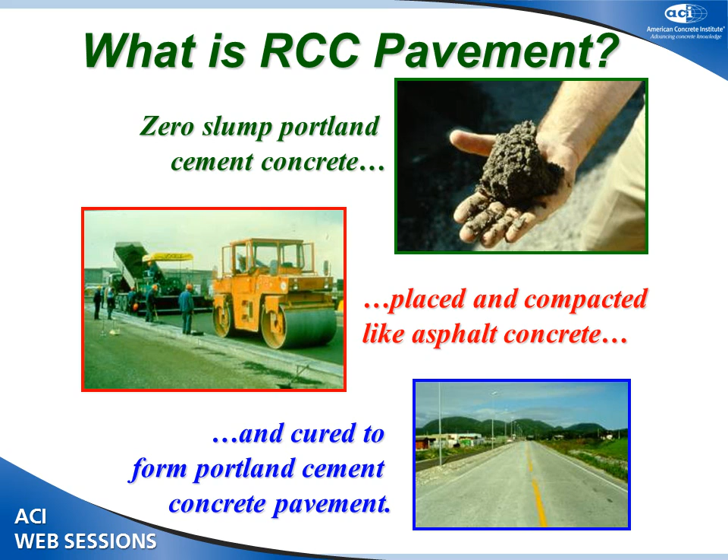Materials and construction - we've already talked about that a lot. The aggregate, can't overemphasize the need for quality aggregate. From the very beginning, on the material side, particularly the aggregate, from an asphalt concrete perspective, you need something fairly well graded. Crushed, in my opinion, is better. Generally what you're looking for is something that will hold up under a roller when you're compacting it. That's what's going to govern a lot of your aggregate properties - how it handles in the fresh state.

Typically a 3/4 inch top size, maybe a 1/2 inch maximum size. You can allow up to 8% fines in it, just to give you a good consistency during construction and help the surface close up. Sometimes you even add fly ash to actually get a little bit more fines in the mix.

Talking about the constituents, you might have a little bit less cement and fly ash, a little bit less coarse aggregate, more fine aggregate - again it takes that to give that fairly well-graded aggregate mixture in the RCC. Definitely less water, and your water-cement ratio, by definition almost, is going to be pretty low, between say 0.25 and 0.35 generally. That leads to very high strengths, by the way.

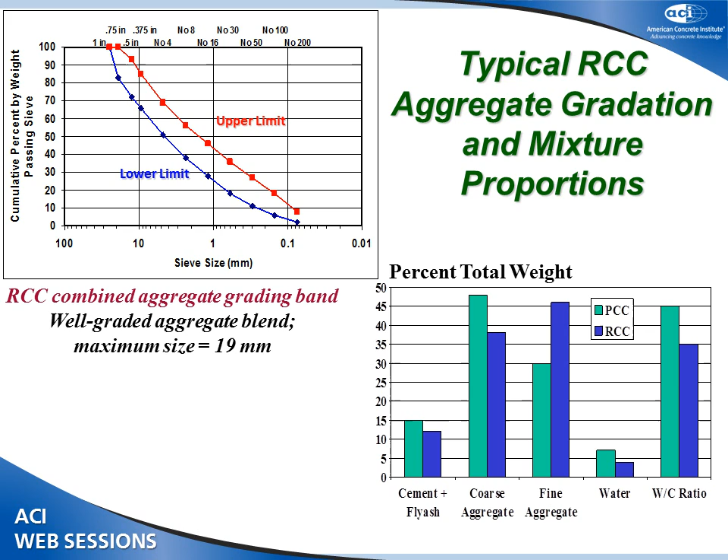We've already talked about continuous mix and Pugmill plants, and Frank talked about ready-mix trucks, but typically in the Corps, at least, we use Pugmill plants.

You see some of the plants we used back in the 1980s. This kind of machine took a couple of days to get set up and running, producing a few hundred tons an hour. But now you can get a machine that can have you set up and running in a couple of hours and produce several hundred tons an hour.

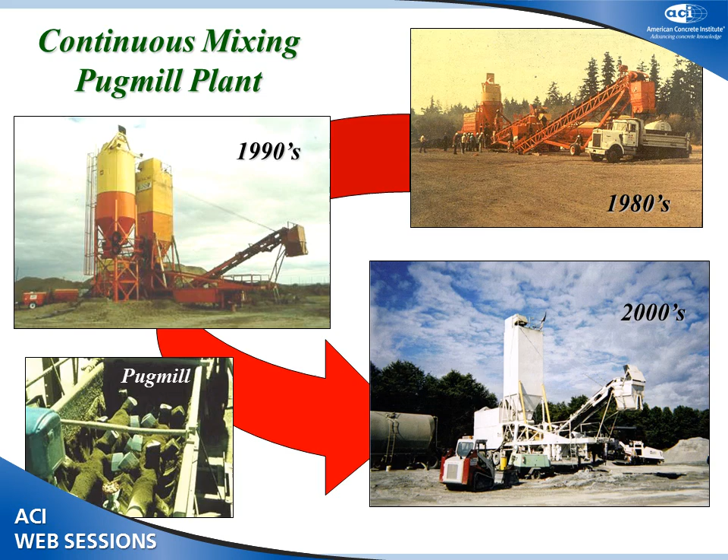Placing, we've already talked a lot about placing. In the early days, we just modified an asphalt paver, opening up the throat between the hopper and the screed. But these days, with these high-density screeds, originally built in Germany and now built elsewhere, that really revolutionized, in my mind, the way you put down RCC pavements. You get a fairly high-density, fairly uniform material coming out of the screed, and that's going to dictate everything about the quality of the final pavement.

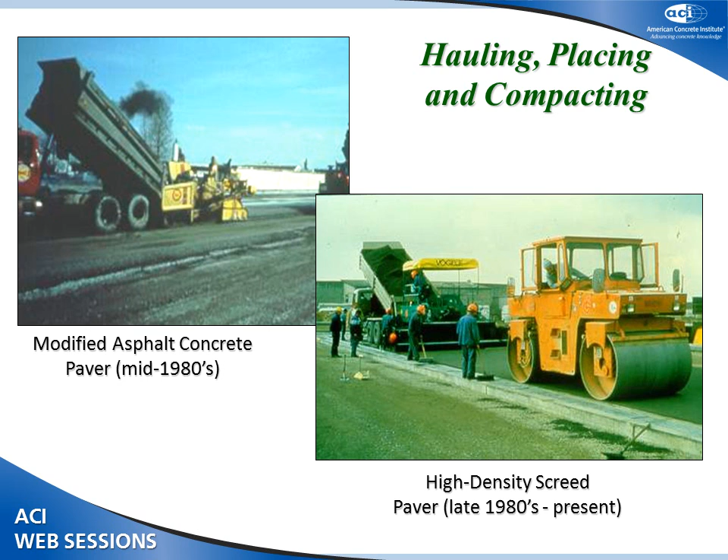And then, of course, we talked about compaction. As Wayne said, that's a very critical point. If you don't get your compaction, you're not going to get your density and strength. Pay that guy right there pretty well, by the way, because he can dictate a lot of the quality of your pavement. If he knows how to operate that roller and get you a smooth, dense surface, then he's well worth his money.

We already talked a lot about curing. In the early days, what we did mostly was water moist curing, and here we are in Germany on some projects where we actually use irrigation sprinkler systems to keep it moist all the time. That's one of the first major lessons we learned at Fort Hood, Texas in July of 1984, on our first major project with the Corps.

We talked about hot, dry, windy weather here in Texas all the time. Well, we found out what impact it has on RCC at that Fort Hood project, and it kind of made a mess of that original project. The surface dried out too quickly, and when the surface dries out too quickly, it crumbles after a few weeks. So we totally understand that now.

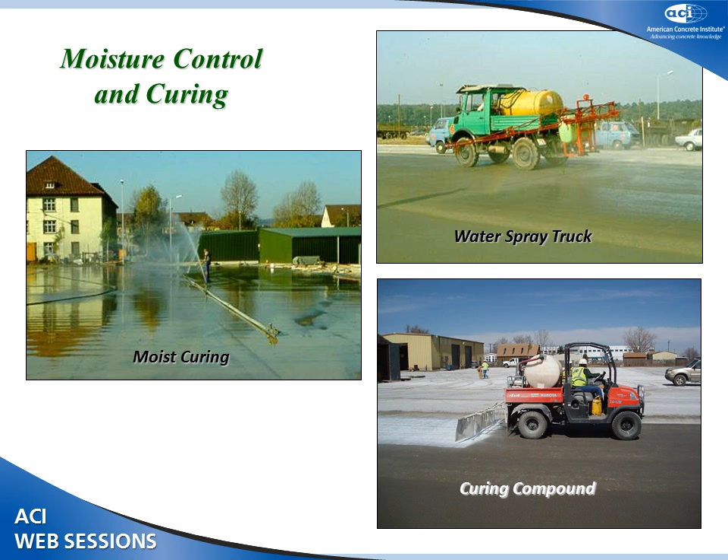One of the most important messages here is you've got to keep it moist at all times until it gains its strength. Use whatever method you can, like a water spray truck, to keep it moist until you can get your more permanent curing compound down. But never let that surface dry out until you develop your strength.

We already talked about quality control and assurance. Again, very, very important. Probably the most important test is checking your density, typically with a nuclear density gauge in full transmission mode. You need to drive a hole into the RCC and try to do it through the full depth, and generally we shoot for 98% density, or 96% closer to a joint, similar to asphalt concrete pavement.

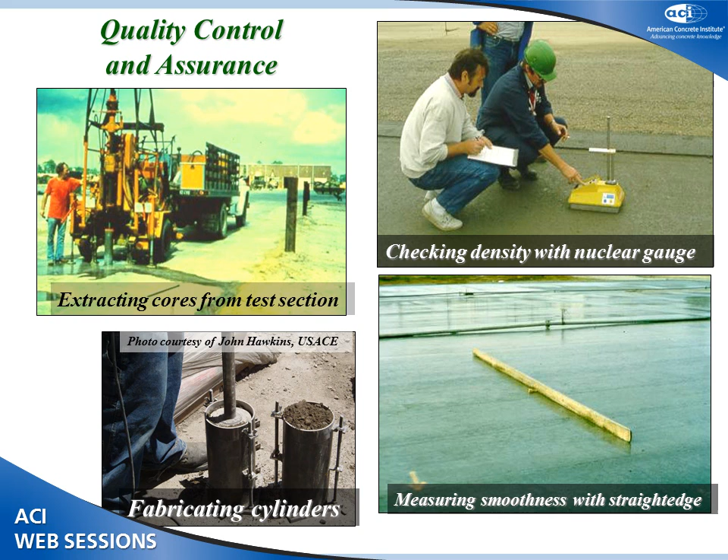We already talked about fabricating cylinders. We have smoothness tests too; we still use a straight edge in the Corps of Engineers. And we have a little bit looser spec on smoothness with RCC compared to concrete. You can go up to a quarter inch off the measuring edge of the straight edge.

We talked a little bit about joints and cracks this morning. In the early days, we allowed RCC to just crack naturally, because that's what the Canadians were doing. We sort of stole this idea from the Canadians for log sorting yards and that sort of thing in the 1970s, and brought it to the U.S. They weren't sawing joints, so we said, why do we need to saw joints? But later on, as we saw the potential of this material, we said we need to saw joints in this.

So what we do is try to follow the natural tendency of the material to crack at 10 to 30 plus meters. The thicker it gets, the further apart the natural cracks will be. I've seen natural cracks occur over 100 feet apart, sometimes 200 feet apart, on very thick pavements. So you want to control that, and you probably want to saw your joints at 10 to 15 meter intervals.

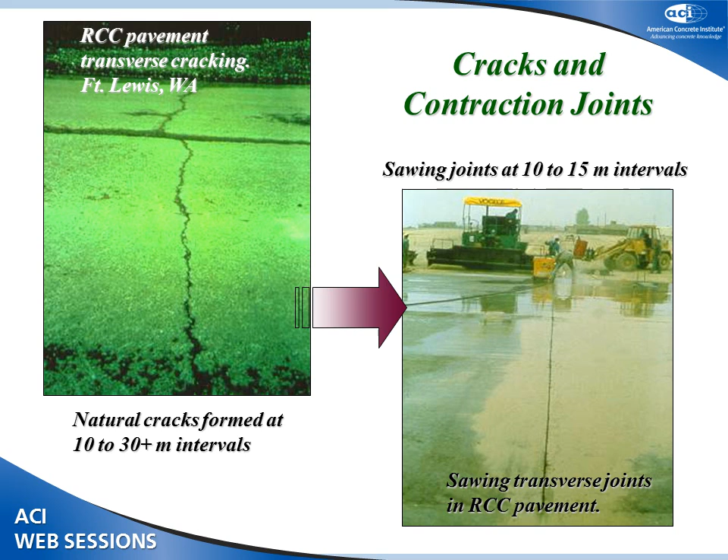Okay, advantages and limitations. We've talked a lot about this already.

If you don't have a low construction cost - typically an average of about 27% over 30-something projects has been saved, from data we've collected around the United States - if you don't have that low construction cost, you're probably not going to be looking at RCC, to be honest with you. And it's due to a lot of things: you're putting a lot of concrete down fairly quickly, no reinforcing steel, no forms, less equipment and labor compared to conventional concrete slip form paving, for instance.

Ease of construction - a lot of this low construction cost is because it uses existing methods. You just got to find somebody to do this. High strength because of the low water cement ratio and high density. And Wayne talked this morning about the ability to load it early - that's a very important property.

Some limitations - you're probably not going to use this just anywhere. Smoothness is generally not going to be as good as conventional concrete or asphalt. Surface texture - we talked about managing expectations on that, it looks more like asphalt concrete. Uncontrolled cracking - if you decide not to saw joints, people need to know you're going to have cracks in it versus a nice saw joint. Raveling - when you don't prepare the surface properly, particularly at joints, you'll have a tendency to ravel.

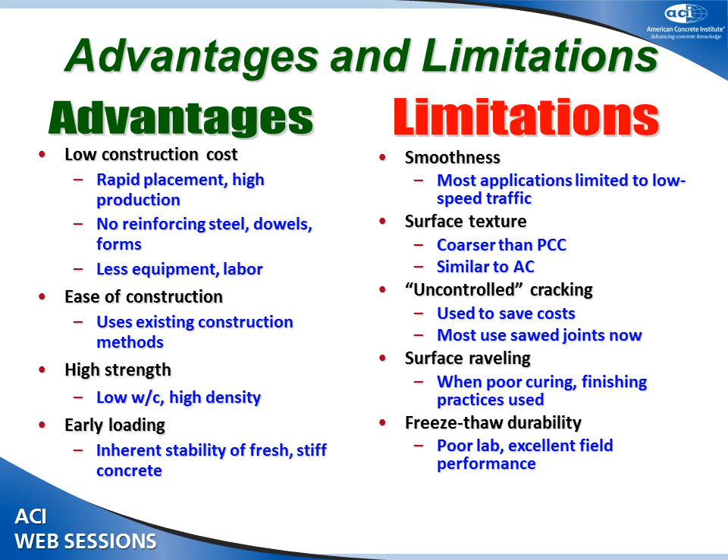And then the durability - if you test the freeze-thaw durability of RCC in the lab, it will not do very well, probably. But its performance in the field has been phenomenal. I've got some pictures I'll show you in just a minute. And that worried us a lot, frankly, in the Corps early on - the durability - but it turned out to be a concern that wasn't realized.

So here's the applications and trends I want to speak to you about. Here's that project at Fort Campbell, Kentucky. We actually built this in 1987. I took this photograph, and in 2008, 21 years later, took the same photograph, and it's still performing excellent.

At Fort Campbell, Kentucky, what really hurts the concrete pavement, of course, is the freezing and thawing cycles - it's the number of cycles a year you get, along with moisture. That can really tear your pavement up. They get over 60 cycles a year, okay, with little or no damage. This particular project saved 30% over conventional concrete.

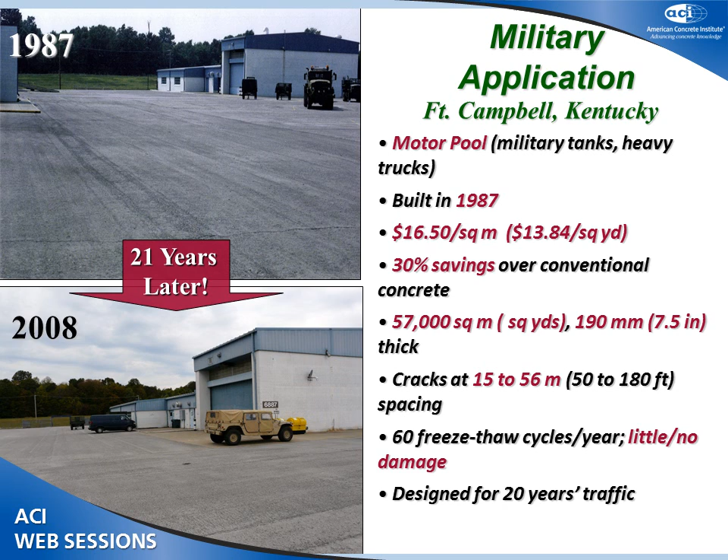Here's Fort Carson, a much more recent project - this was in 2008. Very, very nice job. You can see some longitudinal cracks occurring in this one because they pulled that entire width right there, the width of the road, in one shot. And when you do that, sometimes you're going to have a tendency of getting a longitudinal crack in there.

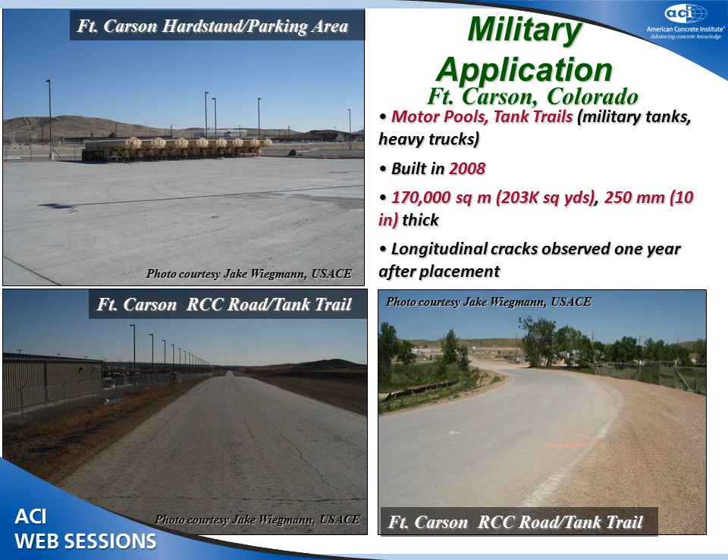That would happen with conventional concrete as well, by the way. So if you want to control that, you'd make a longitudinal cut right up the center of that paving lane. Here's public sector - the first two I showed you were military applications.

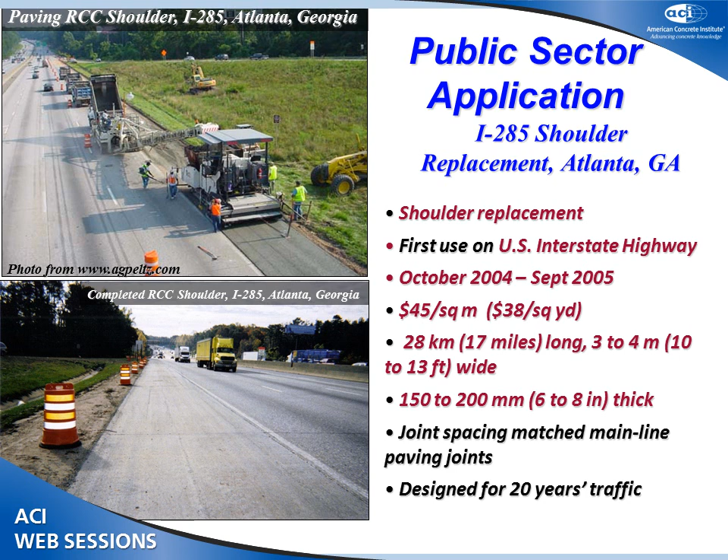The next couple will be public sector, and we've seen a lot on roads, shoulders. This is an I-285 shoulder replacement in Atlanta, cost about $45 a square meter. Great project - the first use of RCC on an interstate application. It was the shoulder, but I think they were very pleased with that project.

Then we started seeing the private sector take off, and as Wayne talked about this morning, the private sector has really dominated with use of RCC in America in the last decade or so. First major one I saw was at Saturn, the Saturn plant outside of Nashville, Tennessee. Built in 1989, close to 540,000 square meters - it was a very, very large job. There was a job going on at the same time at Fort Drum, New York.

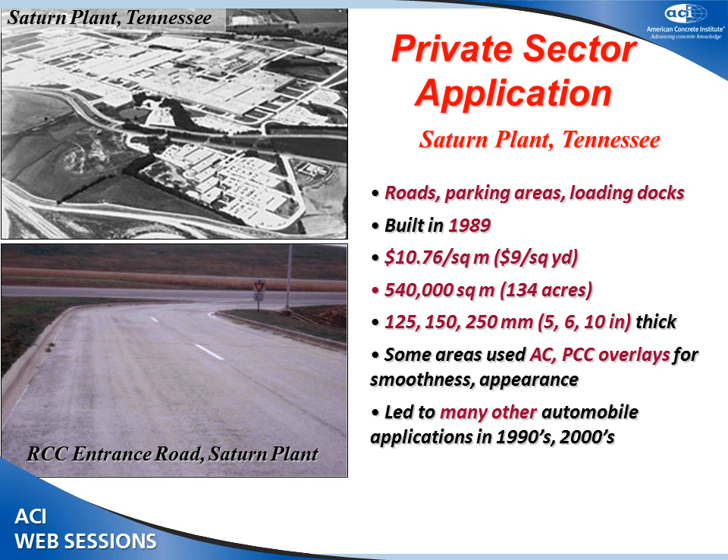They were competing about having the largest project, I believe. But that sort of kicked off the use in automobile plants. In the last 15-20 years, there's been a series of automobile plants built in the southeast, and a lot of them have used RCC for their pavements, for what we call a light industrial pavement application. This particular job at the Honda plant saved 30% over asphalt concrete. Most of the cost savings I report here were actual comparisons of bid costs, so they're comparing apples and apples as much as possible.

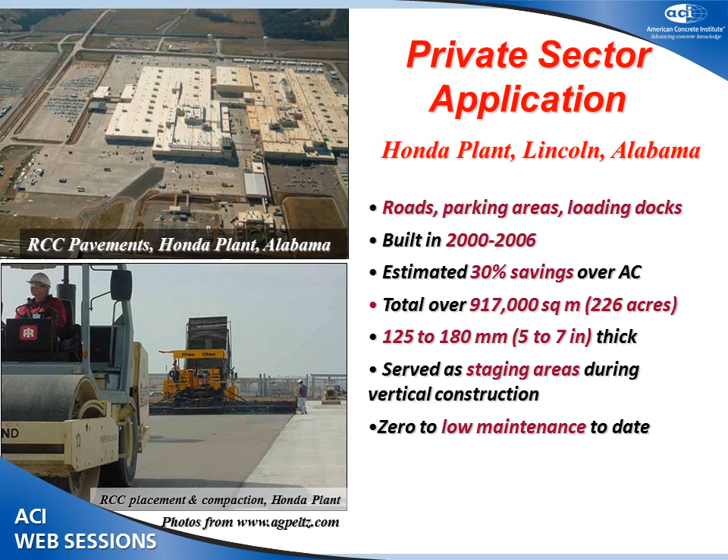Here's a slide that Wayne showed earlier, and I'm going to show you a few slides that are a little updated from the information Wayne showed, because Gary and he showed data from a paper we wrote about 4 years ago. We've since updated that with additional data, and a lot of you in this room provided some of that data to us. We assimilated that, and I want to show you some trends we found out about RCC.

Now, this is all the projects. I'm not claiming that it's all the projects in the United States, but it's probably most of them, a fairly good sum, and it's great to look at trends with RCC. Now we're up to almost 14 million square yards. You can see it's dominated by the private sector. The public sector's really kicked up a lot too, but it's a fraction of what the private sector's done over the last, since say 2004 or so.

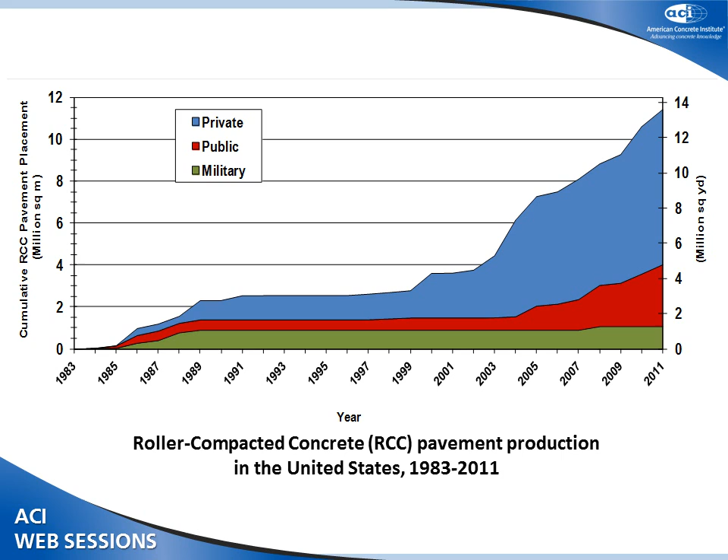In the military, we were one of the early leaders of RCC, but we kind of flattened out. We haven't put a whole lot down in the last 20 years or so, except for that Fort Carson job and a couple other small projects in the last few years. So you can see we're on a fairly high trajectory of uses in the United States as people become more familiar with it and more people get experience putting it down.

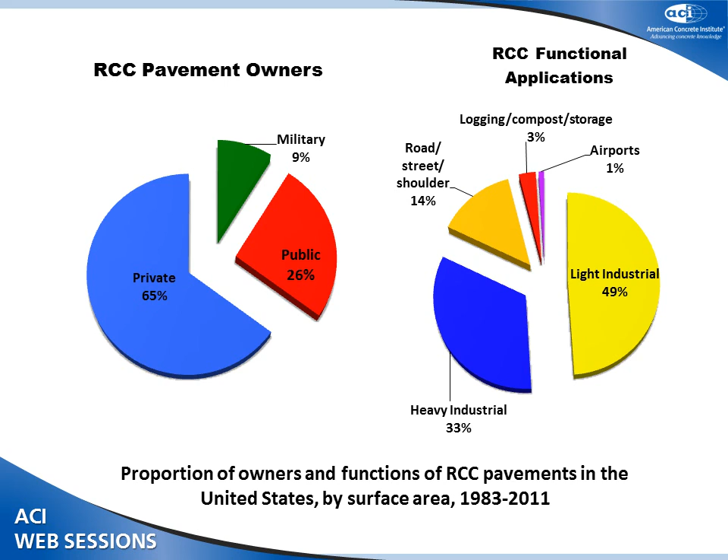Then we looked at functions of RCC. We used that guide that Wayne talked about earlier, which covered design and construction of RCC pavements. They talk about functional applications: light industrial like that automobile plant, heavy industrial like a port, which is going to be fairly thick. Road, streets, and shoulders, that's pretty much your public use. Logging, compost, and storage is that specialty application on log sorting yards and things like that. And then even airports have used it for storage areas of snow and that sort of thing.

This is kind of how it's been used over the decades: the 80s, the 90s, the 2000s, and just 2 years into the 2010s, including 2010 and 2011. You can see how we put a lot down in the 80s. In the 90s, we dropped down in total production. Then we really picked up in the decade of the 2000s, mostly in the light industrial and heavy industrial applications.

With road, streets, and shoulder applications being third. And this year, the last couple of years, we've been on a pace that, if we keep at this pace, we'll have 10 million square yards in just this decade. We'll almost double what we did the last decade.

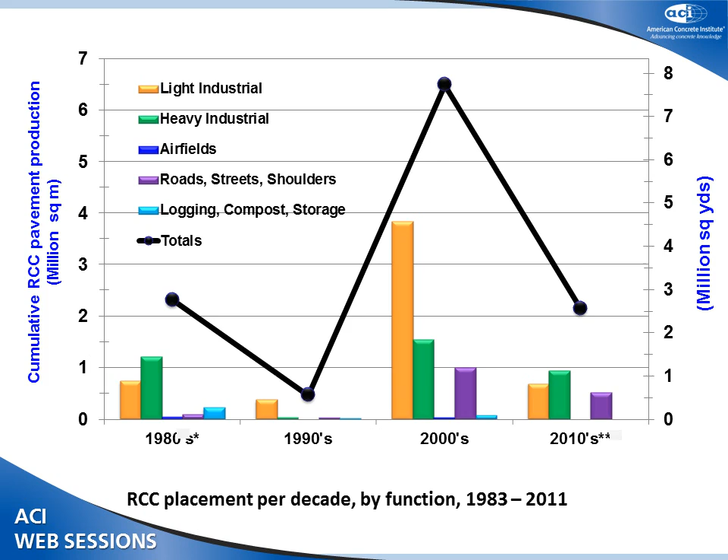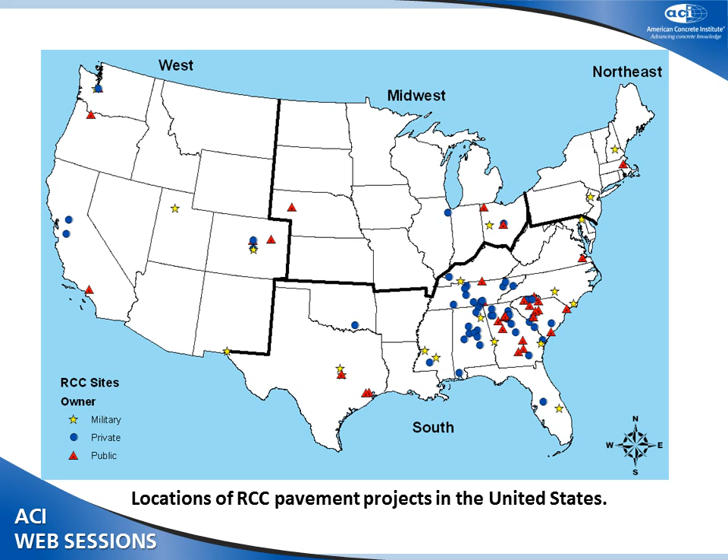Here's where the RCC has been placed. You can see it's been mostly in the southeast because, well, that's just where it's been put down—a lot of the contractors are familiar with it in these areas. It's a lot of good applications, a lot of them, as I said, in Alabama with those automobile plants. But you can see the military has used it all over the United States, and there's a lot of public sector applications. So by region of the United States—south, etc.—this is how the census defines the United States in the 4 regions.

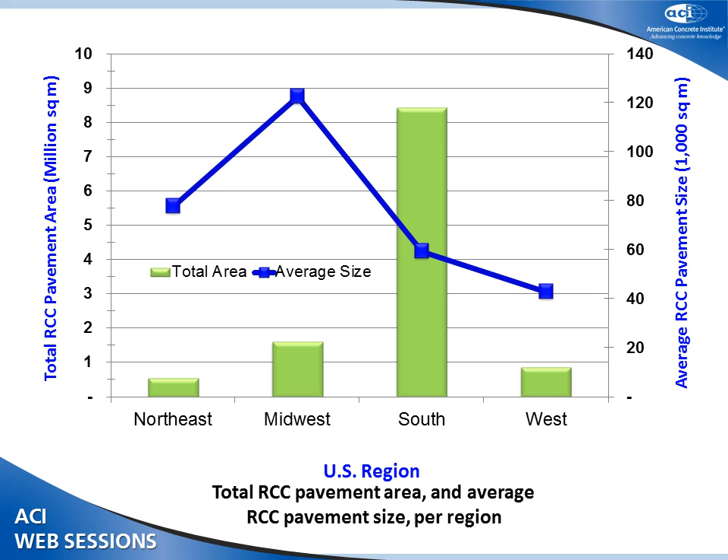You can see that the south has placed a lot more than anybody else in the United States. The average area, though, is highest in the Midwest, and that's about 120,000 square meters.

In terms of states, here's the top 10 users of RCC by state. Alabama by far, with 29 projects, almost 3.7 million square meters—you can see there it's almost about 4.5 million square yards. Texas is number 2 in this case.

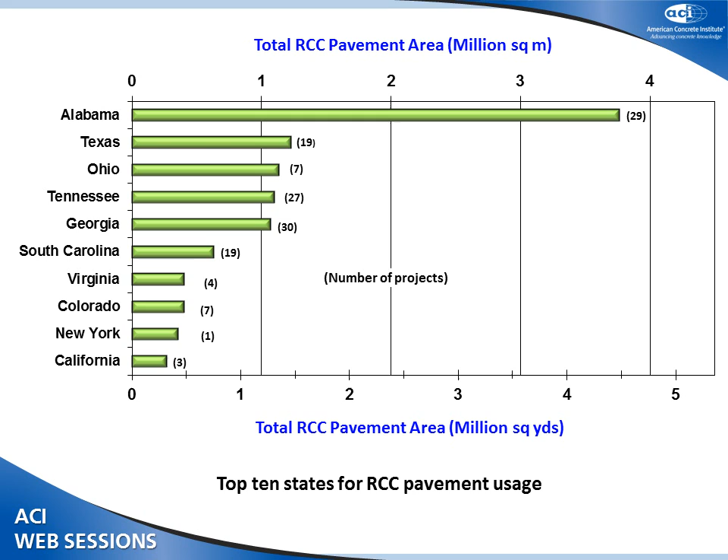So you can see a lot of states, mostly in the south and southeast, but some in other regions of the country as well. This is a busy summary chart looking at pavement size—the average size of RCC pavements placed in square yards by function: light industrial, heavy industrial, airfields, roads, streets, shoulders, log, compost and storage, and all pavements combined. On average, the size of projects in our database was about 82,000 square yards.

A total of about 13.6 million square yards on 167 projects around the United States. The largest project was about 1 million square yards. The smallest, I think Frank talked about a 50 cubic yard project—that might be that one, Frank. Not sure. The median is usually a bit less than the average, because the median is the value at which half the projects are larger and half are smaller. So we've got a lot of smaller projects in this mix all the way across.

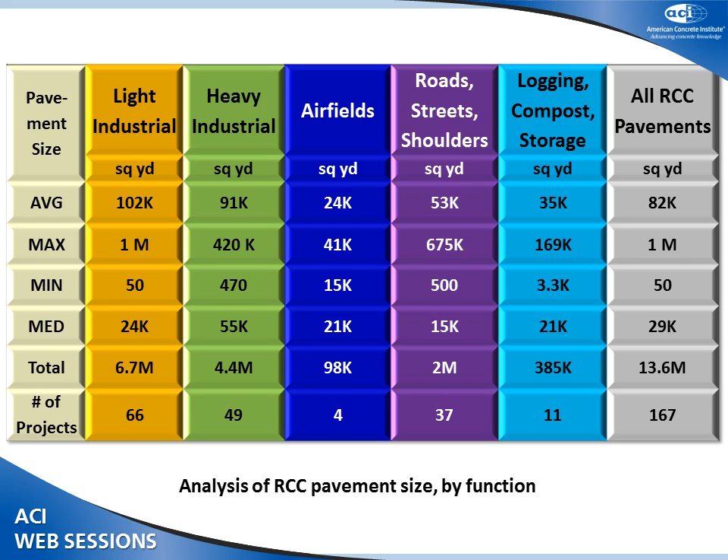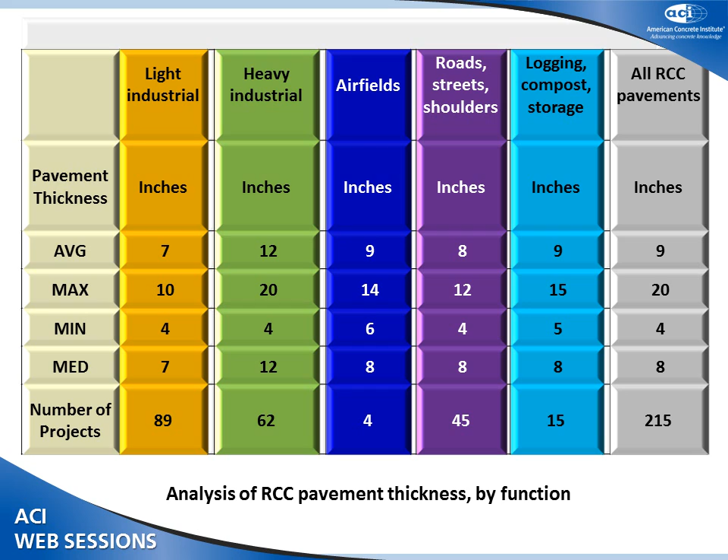Now let's look at thickness, in inches—same setup by application. On average, for all the projects we've seen, it's 9 inches, with heavy industrial being the thickest, as you might guess, and light industrial the thinnest at about 7 inches, with numbers in between for the other applications. There are 215 projects here, more than the previous slide, because some projects as recorded had multiple thicknesses, so we tried to break them down by size relative to thickness.

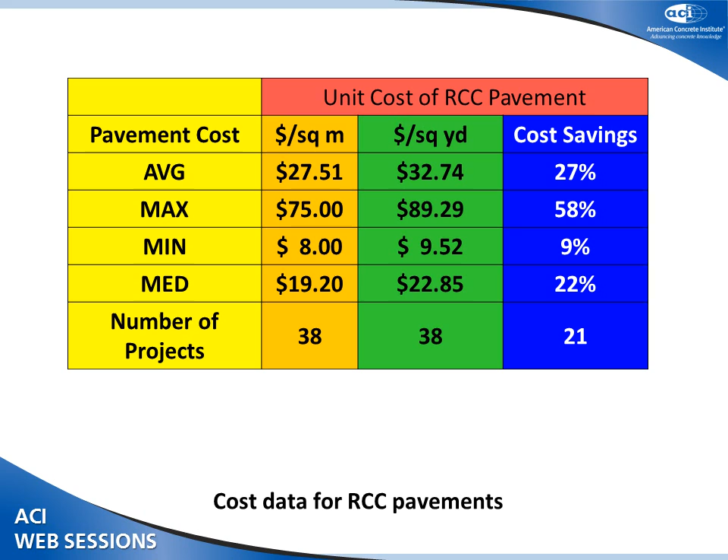So this is my last slide. In summary, we think RCC has a very bright future, and we've been saying that for a long time, but I think it's justified looking at the data—it's exploding out there, and as more folks like you have more interest in this and want to try it, there's a base of knowledge out there that's growing and experience that can really help you out. I think everybody talking up here today is interested in your success, because we all like RCC and want to see a lot of it go down.

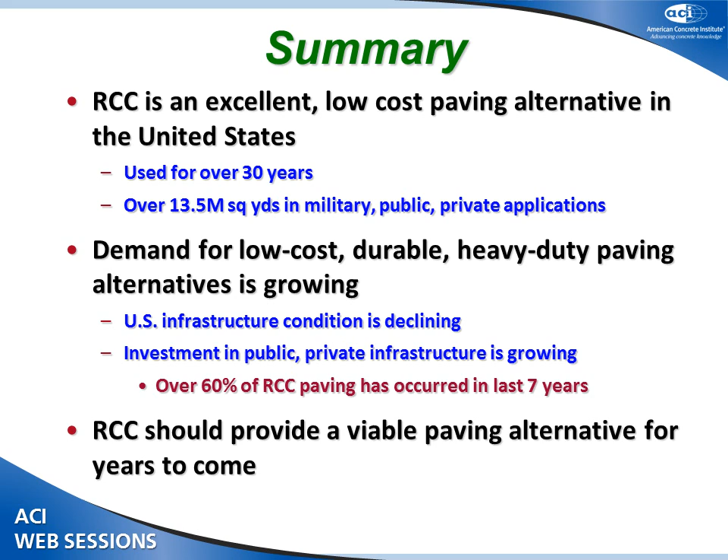There's going to be a lot more demand with time. The infrastructure is not getting better—we've got to find cost-effective ways of replacing that infrastructure, and I think it's going to be around for a long time.